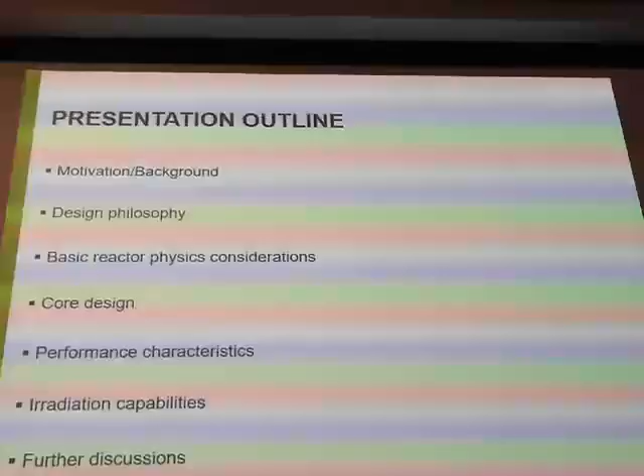It's a very long presentation with a lot of content, so I'll try to skip through it relatively quickly, but at the end, if you have questions, please do not hesitate to ask me.

This study started with the ATDR study, the Advanced Test and Demo Reactor study, which began in fiscal year 2016, a bit more than a year and a half ago. The objective of this study was to define strategic objectives for the country and identify which reactor type would be best suited to meet those objectives.

Three objectives were related to the demonstration reactor, and the fourth objective was related to developing test capability in the US. The FASTER reactor was one of the test reactor concepts developed as part of this study in order to inform all the metrics with respect to the test reactor, but it was not the only one.

Another concept was developed by INL, Idaho National Lab, based on high temperature reactor technology. So we had these two test reactor concepts, and we compared one against another using a set of metrics. I'm not going to talk too much about this study because I could spend an hour on it, but this was a major milestone for the DOE last year, and there's still discussion on moving forward with the findings of this study.

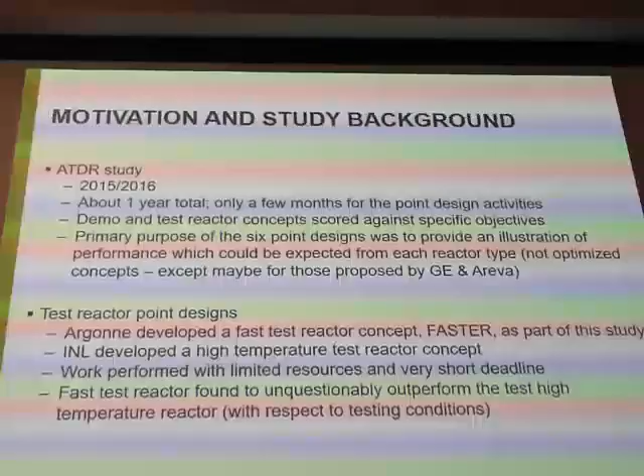For the sake of designing the Fast Test Reactor for this study, we wanted it to be passively safe and sodium cooled. Nothing said it needed to be sodium, but it needed to be fast spectrum. We wanted to use technology which was well established so we have confidence we can deploy this reactor relatively quickly. So don't expect to see a lot of innovation in this reactor. The purpose was not to advance fast reactor technology, but to provide test and irradiation capabilities.

To that purpose, there was a number of desired features. By desired features, I mean if you wanted to score very well as part of this study, you had to meet certain criteria, such as fast flux level needing to be 5×10¹⁵ or higher, thermal flux level needing to be a certain level, and at least 24 test locations, etc., if we wanted to go after the highest score.

But for instance, the HTGR, which was developed as the alternative test reactor, could not meet all those requirements. So don't think it was just okay, I want to meet this requirement and I can get there. But we did the best we could with the Fast Test Reactor.

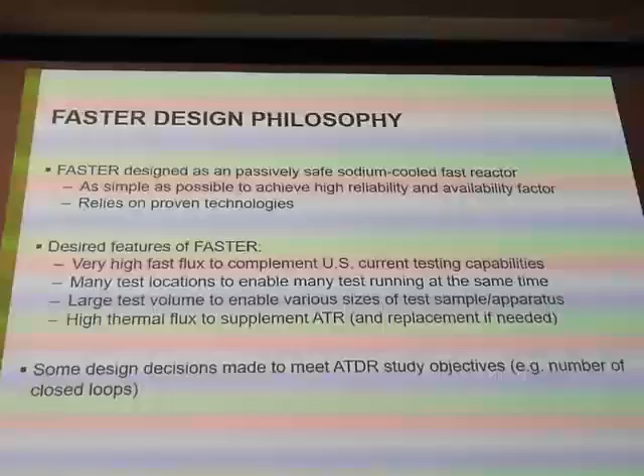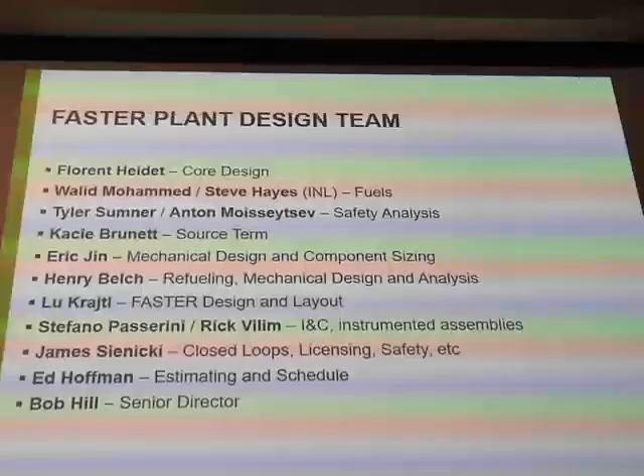So this is a team who worked on this concept for almost a year. I led the core design for this reactor, and there were a bunch of other people at Argonne. Only Steve Hayes was from INL, and he was our expert on metallic fuel, because INL was the only lab who manufactured metallic fuel, so they are still the experts on it. This is not just my work, it's a team effort.

So this is an overview of the characteristics of the reactor. I'll provide a core layout and different views of the plant later on, but this is just to get an idea of what we're going to look at.

So this is a 300 megawatt thermal reactor. As a test reactor, you don't need to produce electricity, because the purpose is just to provide test capability. But in order to recover some of your operating costs, if you can produce electricity and sell it, it makes more sense. The trade-off is you also have to pay for the steam plant if you want to do it. So there are pros and cons, but we decided to design it as producing electricity.

Sodium cooled, it's a pool type reactor. We're using the ternary uranium, plutonium, zirconium metal fuel. Cladding and structural material is HT9, a stainless steel typically used in fast reactors. Average burnup for a fast reactor is very low, only around 3.5%. The peak burnup is less than 5%, so the peak burnup is actually lower than the average burnup you get in a PWR.

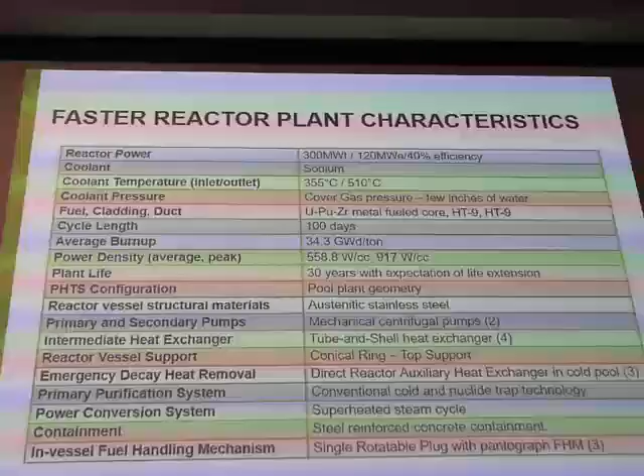The purpose of this machine was not to get good fuel utilization. The purpose was to be compact, to be cost competitive, and to offer very high performance in terms of irradiation capabilities. There are a bunch of engineering features I will mention as we go and look at the different pictures.

So let's start with the core design. This is the part I mostly worked on. I'll provide some physics background just so you understand where we came from and how we ended up with this core design.

First, our objective was to get a high flux level. You need to understand that the neutron flux is almost directly proportional to the specific power of your core - specific power being watts per gram of fuel. There's no magic trick. If you want higher flux, you need to crank up this specific power.

The second thing, which is okay, but if you have very high specific power, you are going to have very high temperatures in the fuel. The peak fuel temperature is dependent on the specific power and the assembly design, mostly the pin diameter. But the peak cladding temperature is not dependent on the specific power - it's mostly just a condition of the coolant temperature, within a few degrees. Some people tend to say the peak cladding temperature is proportional to your specific power, but this is not the case.

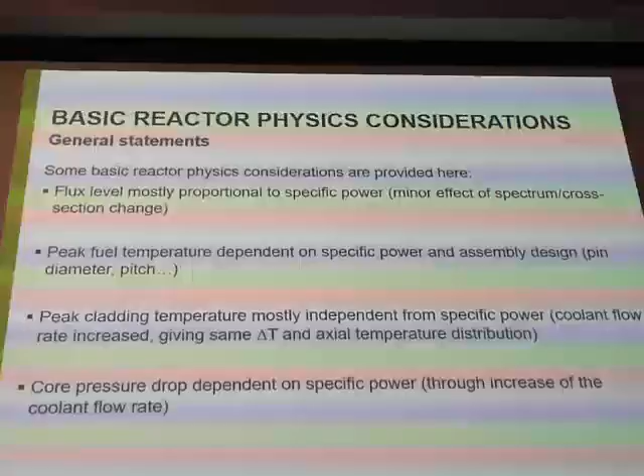And then the pressure drop obviously is proportional to the specific power, though not directly. If you have more power, you need to push more coolant through the reactor, and if you do that, you're just increasing your pressure drop.

So this is a simple story of the process we followed to design the core. Starting point was we want a reactor that needs to be critical - if it's not critical, it's not going to be very helpful. And we want high flux for it. So to make the core critical, we want the smallest, most compact core, so that we don't have an oversized plant which costs too much money.

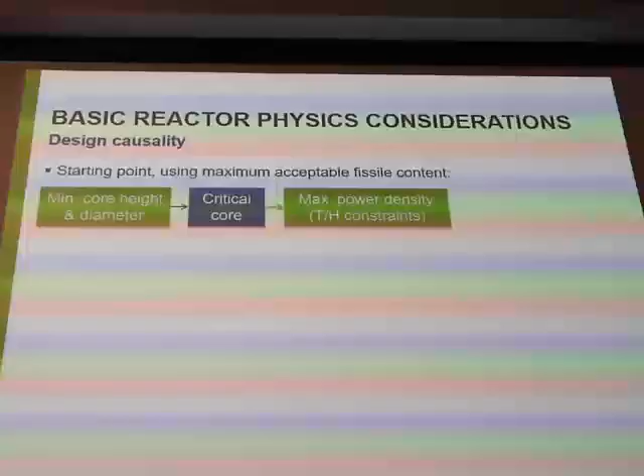So we are looking for the minimum size of the core, the minimum height to diameter ratio that gives us a critical core. Once we have that, it doesn't say what the power needs to be, so we crank up the power to the maximum, where we are very close to the thermal hydraulic constraint - this is basically the maximum power, and therefore the maximum flux we can get from this design. But if you just do that with the minimum core size, the flux level you achieve is nowhere close to 5 times 10 to the 15. It's more like 2 or 3 times 10 to the 15.

So how do you get higher flux? The objective is to increase the flux level. So how do I do that? I need to increase the power density. That's what I just said before. It's very simple.

I increase my power density, but now I'm exceeding my thermal hydraulics constraint, so I need to do something about that. So what I do is reduce the height of the core, reducing my pressure drop, and increase the diameter of the core to keep the core critical.

It's great, but initially I had the better configuration for the core. If I reduce the height-to-diameter ratio of the core, then my core becomes larger. So basically the volume is larger, but I have the same power, which means I'm reducing my flux level because I increase the leakage probability.

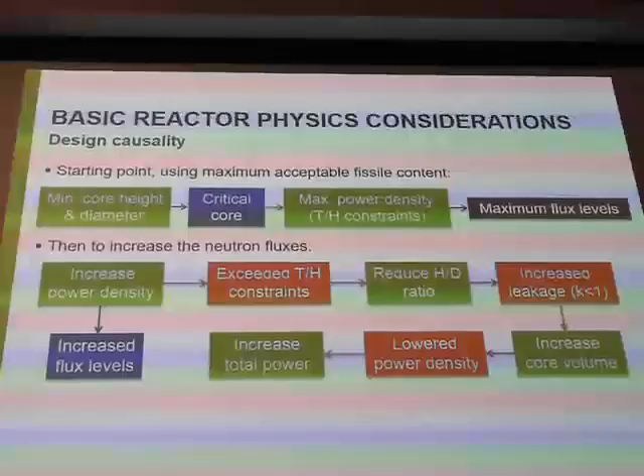So then we need to keep going - because we increase the core volume, we need to increase the power. Sorry, I went backward. Lower power density, I said that, and then we have to increase the total power of the core. So from this starting point, if you go with the minimum size of the core to make it critical with the maximum power density, it's probably 200 megawatts. But because we had to go through all those extra steps to crank up the power, we had to increase the power to 300 megawatts.

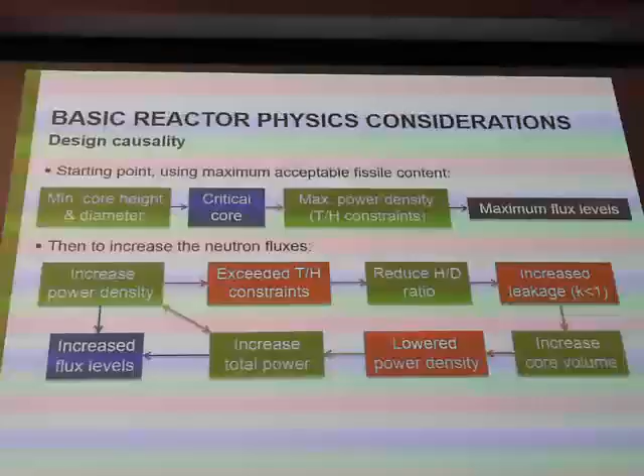Obviously, if we decide that the flux level is not very important, and all we want is, for instance, the testing condition, the coolant, the environment, the temperature, then we don't need to go through all of that, and we can just stick with the simplest design.

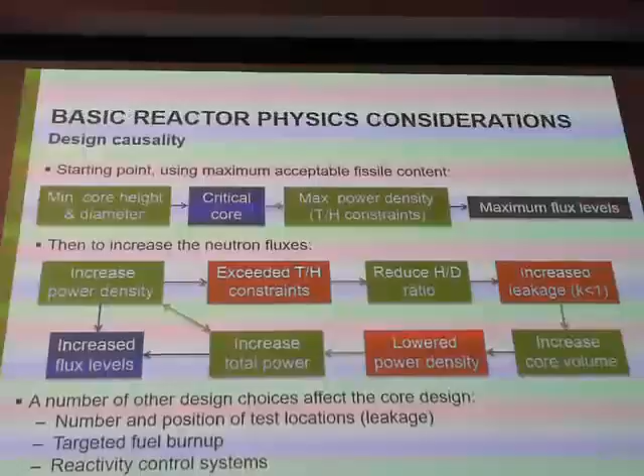There are a number of other considerations, this is a simplified description of the design process, which affect the core design. The number and position of the test locations - the more test locations you have, the more neutrons streaming out of the core, so you're increasing your leakage, making the core larger, or you need higher enrichment. Targeted fuel burnup - the higher the burnup, the more parasitic absorption you have in the reactor. Same thing for the reactivity control system - depending on the location, you can increase the leakage and the parasitic absorption.

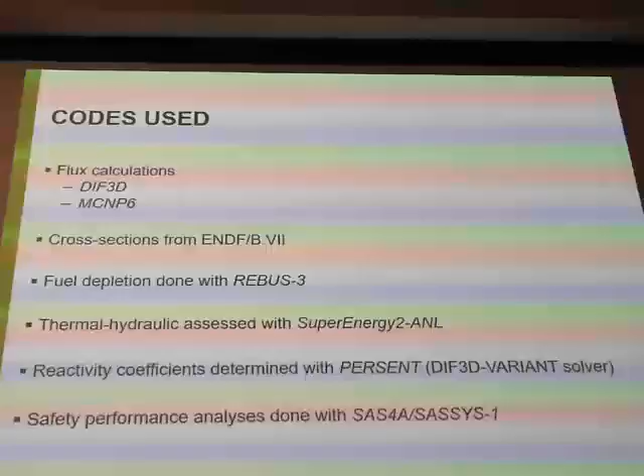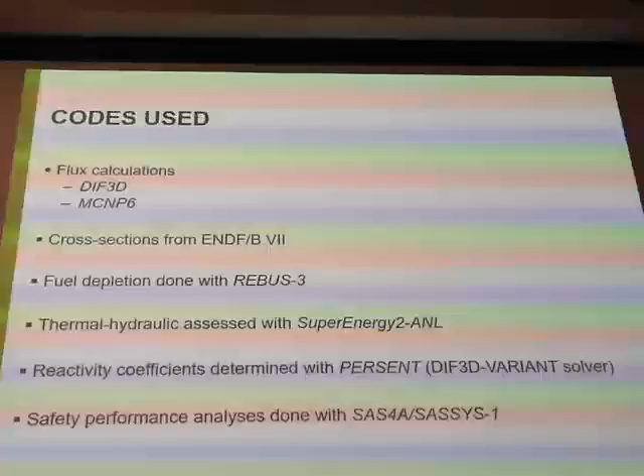So these are the codes we use, basically the codes we have at Argonne and MCNP6. Everybody has this one, libraries are the same. The thermal hydraulics analysis was done with SuperEnergy2-ANL, a MIT code developed many years ago. Reactivity coefficients are done with PERSENT, our perturbation code for fast reactors, and SASSYS, SAS4A, the code we typically use for transient analysis of fast reactors.

So let's take a look at the fuel. This is the only part of the fast reactor design which is slightly out of the ordinary. The purpose was to add as much fuel as possible in a given volume. So we decided first to go to 6 weight percent zirconium instead of the typical 10 weight percent zirconium. There are a number of studies showing that at 6% weight zirconium, all the characteristics of the metallic fuel remain the same, and there is irradiation data actually for 6 weight percent.

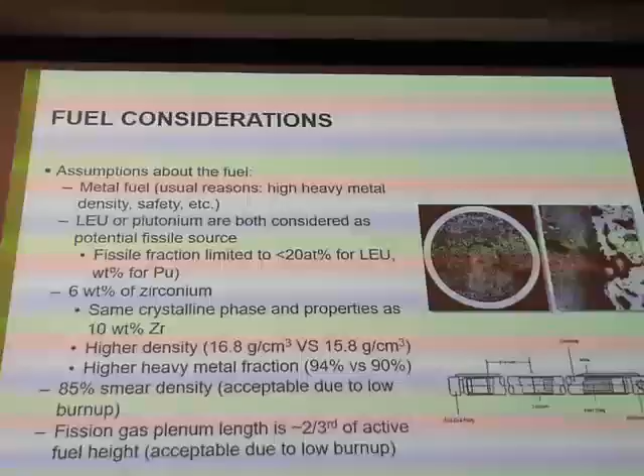We had the choice between LEU or plutonium as a fissile source. Truth be told, if you use LEU, your flux level is going to be 20% lower than if you use plutonium, no matter what - it's based on neutronics, the cross-section and the eta value. So obviously we decided to use plutonium, and because plutonium is not enrichment, we're not talking about enrichment. In theory there is no 20% enrichment limit, and we could go to 60%. But the issue is we did not have any irradiation data past 20%, so we decided to limit the plutonium content to 20% so that we have experimental data to justify that the fuel is going to behave properly.

Another change we did was metallic fuel swells a lot more than oxide fuel. So typically, we call the smear density, which is basically you leave some space between the pin and the cladding itself. So this space is 33% of the fuel volume, meaning we have 33% empty space. And the burnup we're achieving in this case is relatively low, so the fuel isn't going to swell as much as in a typical fast reactor. So we decided to use 85% smear density instead of 75%. And because of that same low burnup, we decided the fission gas plenum, which is typically at least the length of the fuel, will be shorter, so we can have a more compact core and reduce the pressure drop.

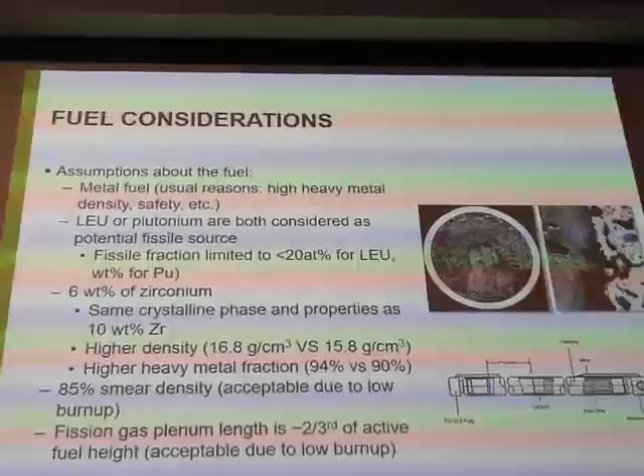So now finally we can see what the core layout looks like. It's somewhat unusual, as you can see. All the blue regions are the fuel assemblies. Dark blue and light blue are basically the same assemblies, same plutonium fraction, etc., just different sets of cross-sections for the neutronics. In light gray, you have the reflector. In dark gray, you have the shield. All the green locations are the test locations. The dark green are what we call closed loops, and I'll talk about that near the end of the presentation. And then we have these regions I will be talking about. In pink, we have the reactivity control system.

So you're probably wondering, it's weird, what is that? It says thermal test location, moderator, thermal closed loop. Because we do not want this test reactor to just provide fast testing capabilities, we want it to be able to provide testing capability for light water reactors, MSRs, HTGRs, etc. What we can do with a fast reactor, because the neutron leakage is so large, we can take advantage of the neutrons leaking out of the core. We can moderate it with graphite, beryllium, zirconium hydride, something like that, and by doing that we can enable thermal testing capabilities.

So in that case, the brown moderator assemblies are made of a beryllium can with zircaloy, but the specifics of this zone are still being refined. But the major issue with having that in a fast reactor is typically your fissile content in the fast reactor will be 20%. You have neutrons leaking out, and the mean free path of a fast neutron is 30 centimeters or more. The pitch of one assembly is 16 centimeters, so the mean free path of a neutron here is at least two assemblies. The neutrons are going to reach these regions, they are going to be moderated, and some of them are going to be reflected back towards the fuel.

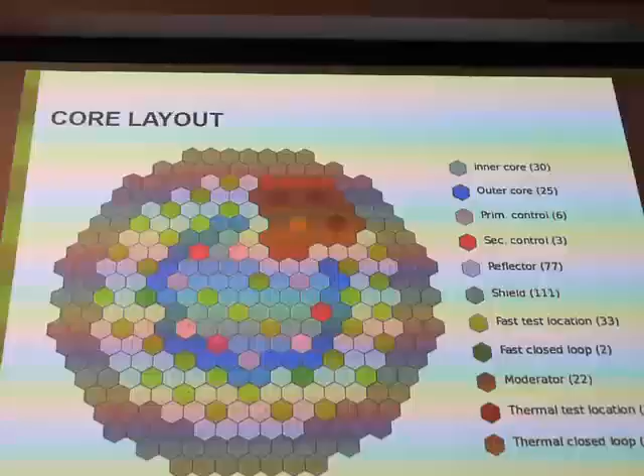So we already went through some of those characteristics. It's a 300 megawatt thermal reactor. The fissile content is nearly 20%. Active fuel height is 80 centimeters, which is a typical height for fast reactors. Beginning of cycle K effective is not very relevant, it's critical. So let's go to the average power density and peak power density. We see the average power density is 560 watts per centimeter cubed. To give you an idea, in a typical fast reactor, this value is 300, so basically we cranked up 75% more power than a typical reactor. And this is exactly why, instead of having a fast flux of 3 times 10 to the 15, it's more like 5 times 10 to the 15, just because it's proportional to power density.

And then what's very interesting and very important is the leakage probability. I'll explain later when talking about the reactivity coefficient why it's so important. These are the flux levels we can achieve. The target for the fast flux was 5.0 times 10 to the 15, so we were slightly above it. The target for the thermal flux was 1 times 10 to the 15 or above.

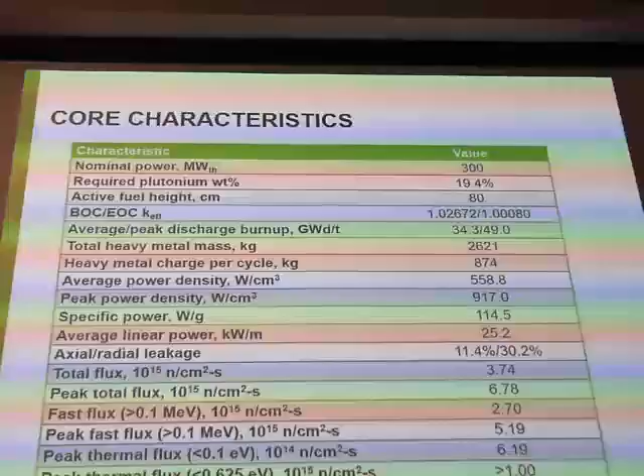To give you an idea of what those values mean, this is a fast reactor which provides some thermal flux, but this thermal flux is higher than what you get in ATR, HFIR, or any other reactor. This is one of the highest thermal fluxes you can find in the world. This illustrates that in fast reactors you can actually achieve very significant thermal flux. It doesn't mean the spectrum in the thermal region is exactly the same as in a thermal reactor, but I have a figure about that later.

So neutron thermalization, I'll go quickly over it. Neutrons leak out and are being moderated. We decided to use beryllium. Initially, we looked at graphite because it's very cheap. First issue: graphite is not necessarily compatible with sodium, so you still need to can it with material to protect it. The second issue is the slowing down power of graphite is not as good as beryllium, so you need a lot more graphite to moderate neutrons, which means your core diameter is going to be larger, and that's really something we do not want.

So beryllium is obviously more expensive. It comes with a set of issues, but this is just one reactor, so we're not concerned about how much beryllium we need. But beryllium has the same issue as graphite - it needs to be canned into something to protect it from contact with sodium.

So HT-9 would have been great, but HT-9, as we've seen, is going to absorb thermal neutrons, so it's not an option. Actually, this is exactly why in PWRs they do not use steel, because iron is not something they want - same thing here. So we decided to use zircaloy 2. Why zircaloy 2? Because this is the only zircaloy which has been tested with sodium. There's nothing saying the other zircaloys are not compatible with sodium, but we wanted to go with something we knew was going to be compatible. That being said, to be fair, it's not been tested at 700 degrees, so at high temperature maybe this is not compatible - more work and research needs to go into this aspect.

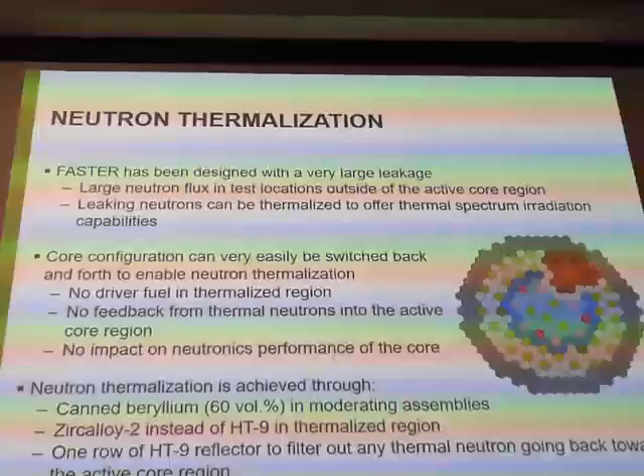So this is the power density distribution. As you can see, this is basically where the thermal zone is. Obviously there's no power in it because there's no fuel. The thermal neutrons will be wandering around there, and you see there's no peak power - the peak power is really located at the center of the fuel region. That's exactly what we wanted.

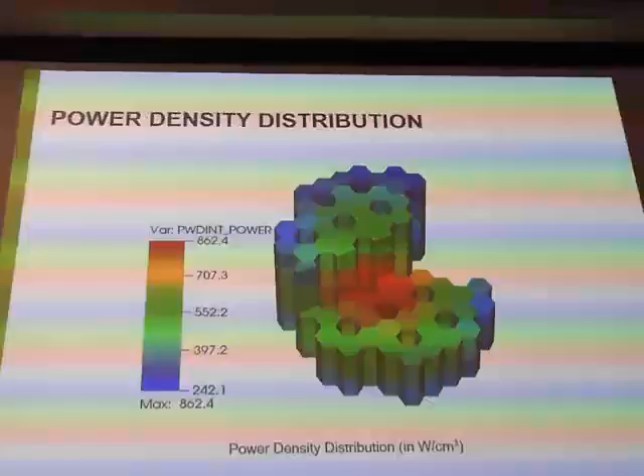This is the flux distribution. In the light blue, at least on this part, this is the fast flux. On this part, this is the thermal flux. Between the red color and the blue color there is a factor of 5, which gives you an idea of how far the fast flux extends and how far the thermal flux extends. Those values are the same as before, so nothing particular, but you can see the clear separation between the thermal flux region and the fast flux region. If you're wondering what the shades are, they're simply the places where you have control assemblies or test assemblies which are empty locations. So obviously if you have no fuel in this location, you have a depression in your flux.

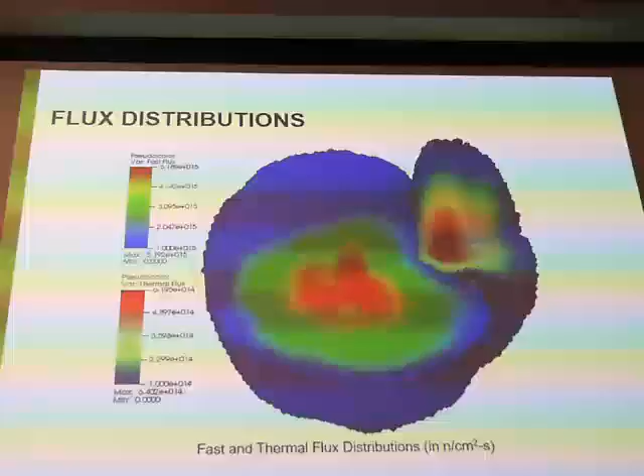So, reactivity coefficients. Very short - we calculated the reactivity coefficients and they are all in line with what we're expecting for a fast reactor, with the exception of just one, which is probably the most important one: the sodium void worth. Typically for a fast reactor, people say the sodium void worth is positive, so it may be an issue - and this is true for large fast reactors. This is a relatively small one, very compact, and very high leakage.

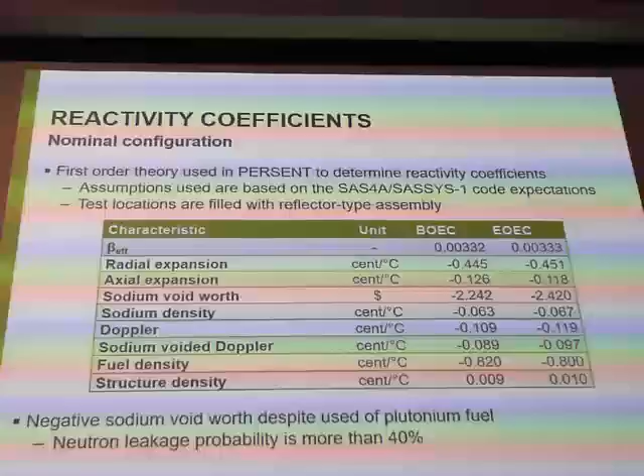So basically what's happening is when you're voiding the coolant from your reactor, you're hardening the spectrum, so you have an increase in reactivity. The compensating effect is that you're increasing the leakage because you're losing your coolant, so you have more streaming out of the reactor. But if you have a reactor designed with very low leakage probability initially, even if you increase this leakage probability by a factor of 1.1, you don't see much increase. In our case, we're losing more than 40% of the neutrons, so any increase in the leakage effect is very significant and results in a negative reactivity insertion, making it very safe.

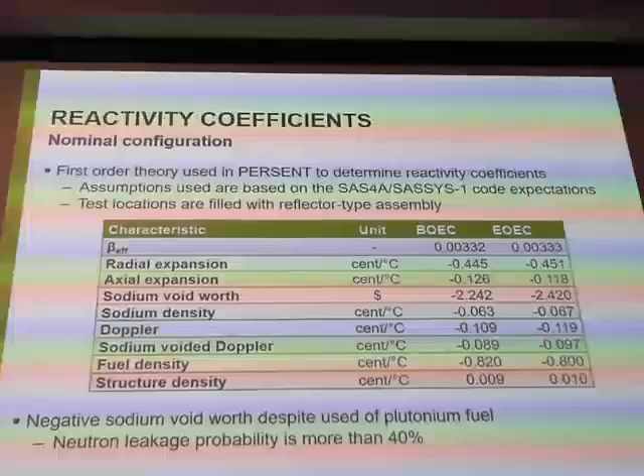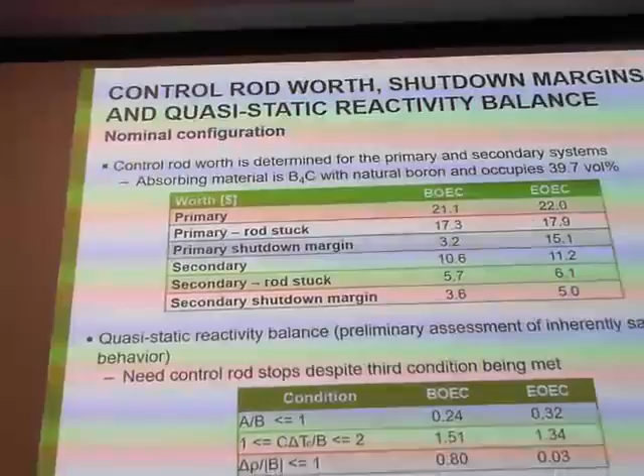So the quasi-static reactivity balance, for people who are probably not familiar with it, it's a very simple approach for fast reactor to verify that in case of accident, the typical accident considered for a fast reactor, the reactor is going to be inherently safe, meaning that the reactor is going to move to a direction where it's going to stabilize itself in safe conditions.

And we have a set of 3 criteria to be met to meet these conditions. So those are the 3 criteria, and those are the values calculated for the FASTER design, and everything checked out. So this was very satisfactory.

We are nowhere close from any of the limits. But that being said, it just means, after you go through your transient, you're in a safe state. It does not mean that during the transient you're not exceeding temperature and you're not melting everything. So don't take it that that's enough and everything is safe. It just means you're going to end up in a safe state if you did not melt anything before that.

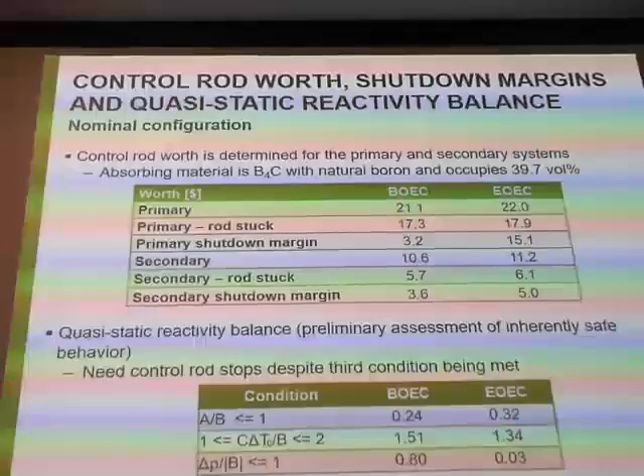So that's our reactivity control, nothing particular there. Typical criteria for fast reactor, like we're assuming that one control rod is stuck, and we want to make sure that just with all those rods minus 1, we can safely shut down the reactor.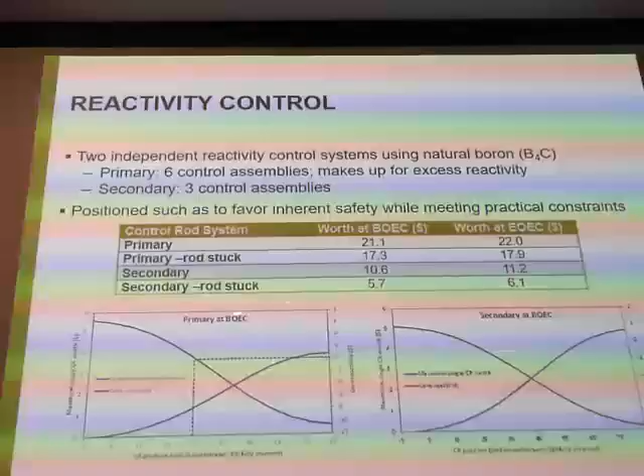All the margins I have on the next slide are fine, the shutdown margin at beginning of cycle and end of cycle. If you're wondering why the end of cycle margin is much larger, or maybe why at beginning of cycle it is lower, it's just because at the beginning of cycle you have excess reactivity because you have fresh fuel. So you have to compensate for the excess reactivity initially. At the end of the cycle you have no excess reactivity.

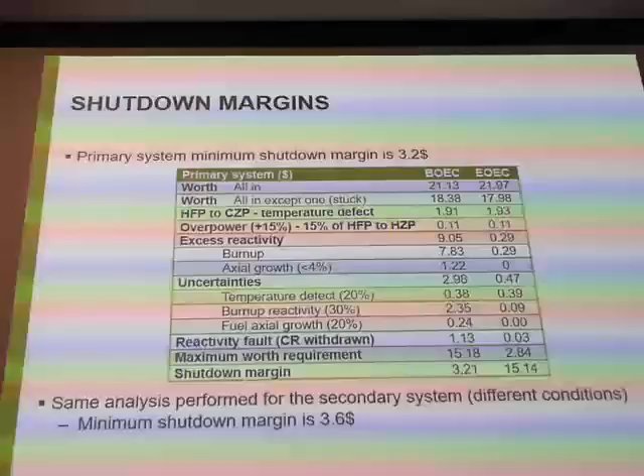So thermohydraulics considerations. In one of the first few slides I showed, the thermohydraulics was one of the design steps for this faster reactor. So what we typically do when we look at the thermal hydraulics for fast reactor, we look at the power generated in each of the assemblies, including the reflector and the shield, because there is gamma energy deposition and neutron energy deposition in those assemblies.

And we determine what coolant flow rate is required in each assembly to properly cool every assembly. We do not want to have issues, so we adjust the flow in each assembly by having an orifice plate at the bottom of the assembly. But we do not want every assembly to have a different size of orifice plate. Otherwise, managing the different assemblies becomes very difficult because they will all be different.

So we're trying to group assemblies having the same power together, so we have only a few groups. We went through this design step where you have to look at how you group the assemblies, and recalculate the transfer of heat between the different assemblies, and those are really the values we are interested in at the end of this analysis.

So the peak coolant temperature, outlet coolant temperature is 550. The average is 510, so we're just 40 degrees above the average, so it's pretty good. The clad mid-wall temperature is 590. It's relatively high, especially for plutonium fuel. Typically we like it to be 580 or below, but because we're cranking up 75% more power than in conventional fast reactor, that's still satisfactory.

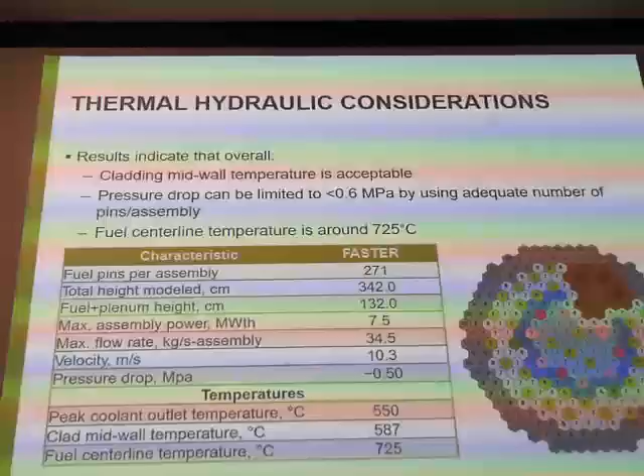So those are the different groups. We had 4 groups for the fuel, and another 7 groups for the non-fuel assemblies. The design objective was to minimize the peak 2-sigma mid-wall temperature, so that's the 587 I mentioned on the previous slide.

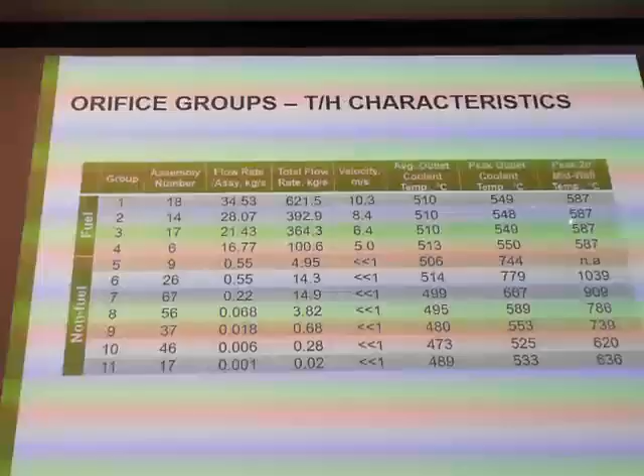So now let's take a look at the plant layout, and then we'll jump into the safety analysis.

This is what it looks like. So it's very busy. You have your core right there. You have your assemblies, you have the pump, one of the pumps you see there, and you have the heat exchanger. As you can see, it's a pool type, so everything is filled with sodium.

You have the instrument tree rotating above your assembly, so you can instrument all the test locations, so you can do all the measurements you may want.

You have the fuel handling machine. This one is slightly innovative. This was not one that was used in EBR2 or FFTF. This one was designed 10 years ago at Argonne for another reactor we worked on before, but it's never been used in an operating reactor to this point.

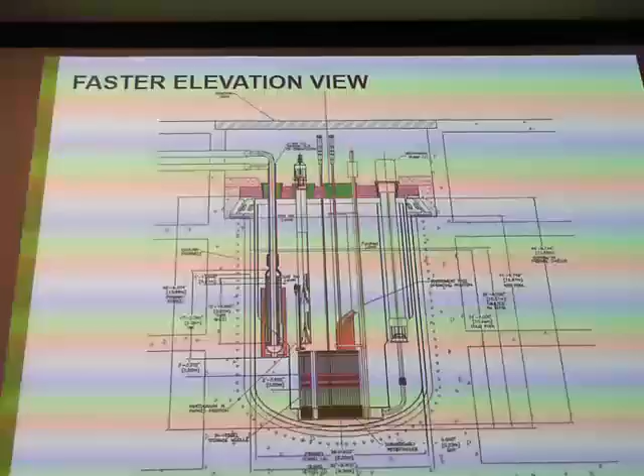And this is a cross-cut, and I will have a slightly zoomed-in cross-cut of the plant layout. So you have the 4 heat exchangers there. You have the 2 mechanical pumps on each side.

Let's see what we have. We have the DRACS. So the system in black are basically fingers going into the sodium pools. In case of accident, if you're losing your heat sink, you're still removing a fraction of the total power from the sodium. So this is a mechanism through which fast reactors can remove heat without having any circulation of sodium.

And then we have the green line, which are basically the line going to the closed loops. And once again, I'll explain what closed loops are slightly later.

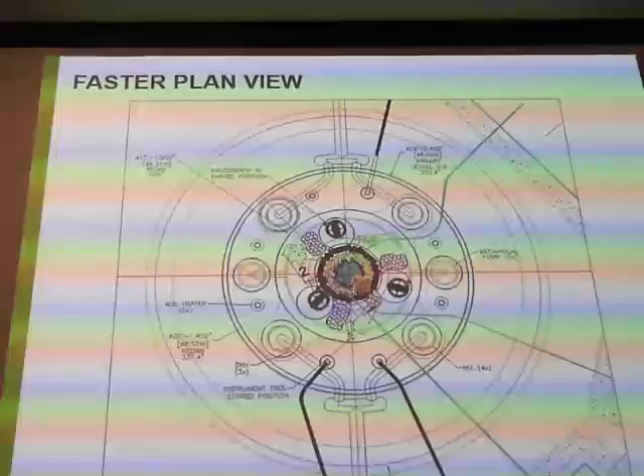And then let's take a look at the zoomed in one. So that's the same one. So you see the core shape. It's been slightly rotated compared to the figure I showed before.

And we have the 3 fuel handling machines. So the question, why 3? If you go with one, it's going to be cheaper. Yeah, it's true. But the issue is because of the closed loops. So closed loops basically have a tube coming out of them, so they prevent you from rotating the fuel handling machine above them. So this fuel handling machine needs to go around this one. And same thing for the instrument tree.

We have 3 instrument trees, and all 3 of them are rotating in place during operation. This is the position when we are refueling the reactor, where they are out of the way.

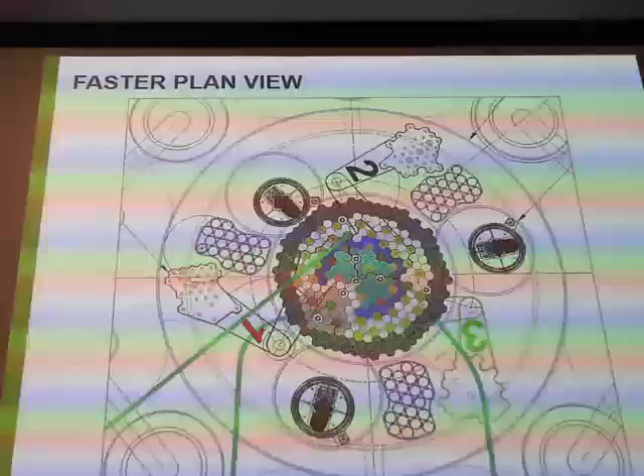And we have the in-vessel fuel storage. So the fuel, after it's been burned for a given amount of time, we take it out of the core, we put it there. We put fresh fuel assembly in the reactor. And after it stays in this position for a few years, we take it out, and then we can dispose of it, reuse it, or whatever else.

So this is just the refueling position. This is the reactor during refueling. So you have the 3 instrument trees I talked about, so they're out of the way. And during operation, as you can see, they're right above the core.

So just to show that by rotating them, we are able to cover all the test locations except a few, which we decided not to, because we're not expecting that everybody will want an instrumented test location. Some people just want to put a material there. They don't really care with the condition. They just want it to irradiate.

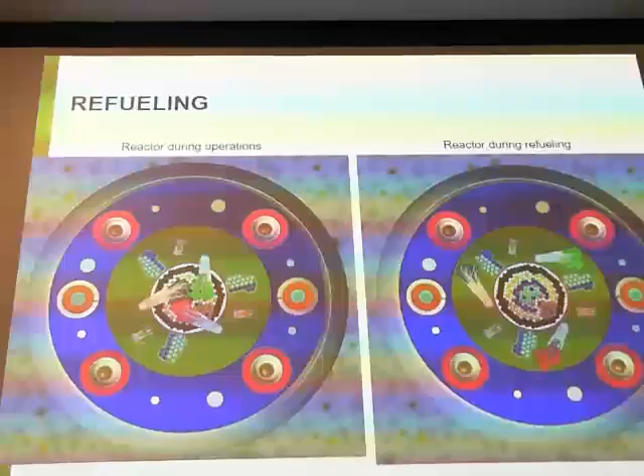So, safety analysis. Let's see.

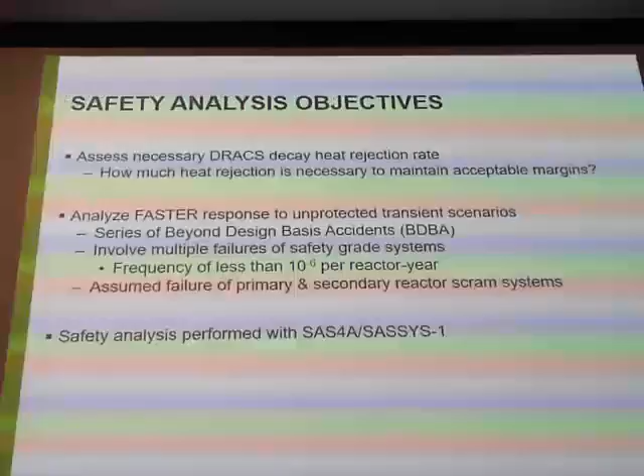So there were two objectives for the safety analysis. The first one was to verify that the DRACS, so direct, these are the fingers I talked about, basically the direct heat removal system, were sized properly to remove enough heat from the sodium pool in case of accident. And then the second part was just to look at unprotected transient scenarios and make sure that the core does not exceed any condition. Unprotected means there is no scram, there is no reaction from the operator, there is nothing happening. Something goes bad, nobody does anything about it. Let's see what happens. It's kind of the worst case scenario.

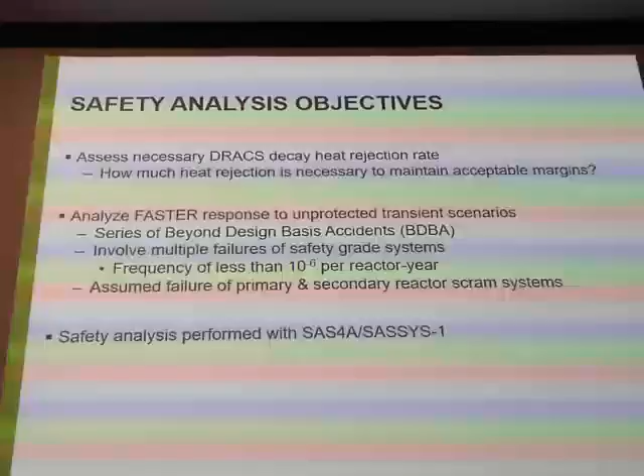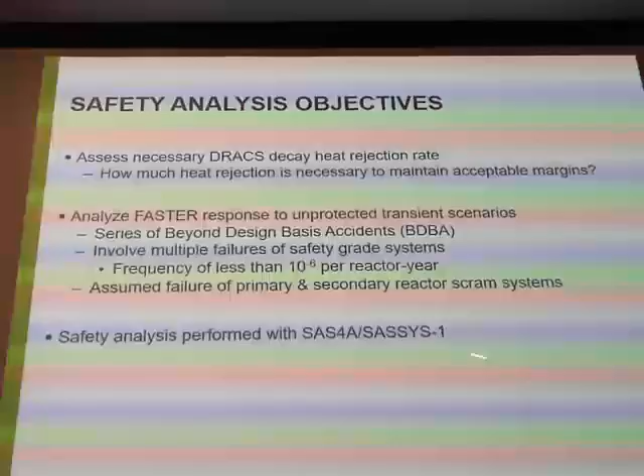If any characteristic of the core is off normal condition, you will scram it, so it will not be such a stringent scenario. So obviously the frequency of those events occurring is extremely low, especially because it assumes multiple failures of critical components. Safety analysis was performed with SAS4A, that's a typical code, in the US at least, for safety analysis of fast reactors.

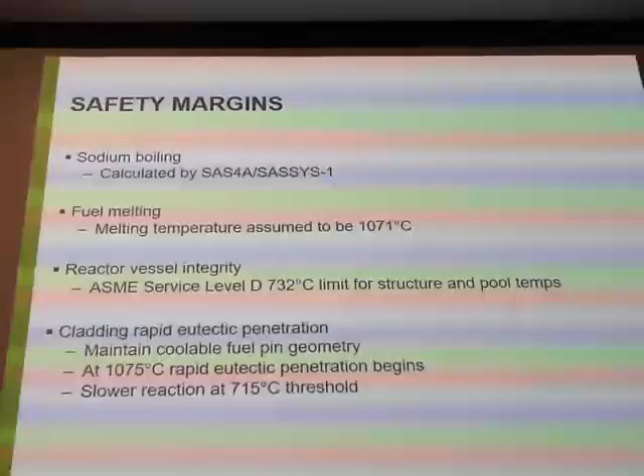So the margins are the following. We don't want sodium to boil, so this sodium boiling point is calculated by SAS4A. Fuel melting temperature is not calculated by SAS4A, and this is depending on the composition of the fuel. So for uranium-based fuel, it's 50 degrees higher than this value, but for plutonium-based fuel, this is 1071 degrees Celsius. Reactor vessel integrity - there are standards not to exceed, so this is ASME service level D.

So that's the value provided for pool-type fast reactors.

For the cladding, which is a major concern, we want to maintain a coolable fuel pin geometry. Basically, it means we are okay if we are melting the fuel near the center line, as long as the cladding retains its shape and coolant can flow around it. But if we have a breach of the cladding, or relocation of the fuel within the pin, this is not a coolable geometry.

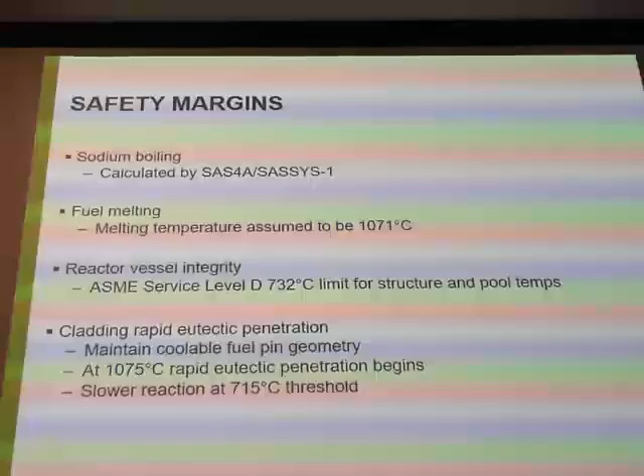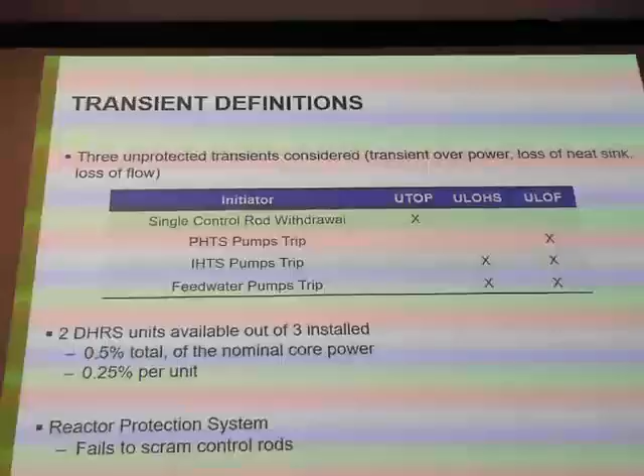We're assuming we have a control rod being removed fully by accident, an ejection of the control rod. Typically in the safety analysis we assume a withdrawal speed, so it's not removed in a second, we assume it's removed by a few centimeters a second.

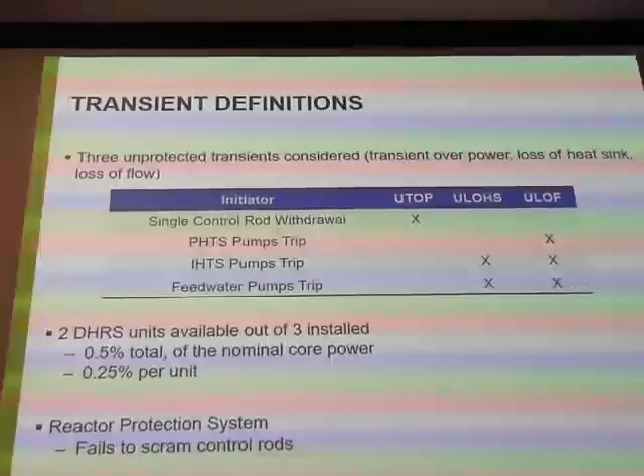We're assuming the DHRS, or DRACS, same thing different names. We have 3 of them in the pool, and we assume only 2 of them are operational. Those are passive features, so there's no reason one of them wouldn't work, but we assume one is not working if, for some reason, the connection is broken or something like that. This is not an active system.

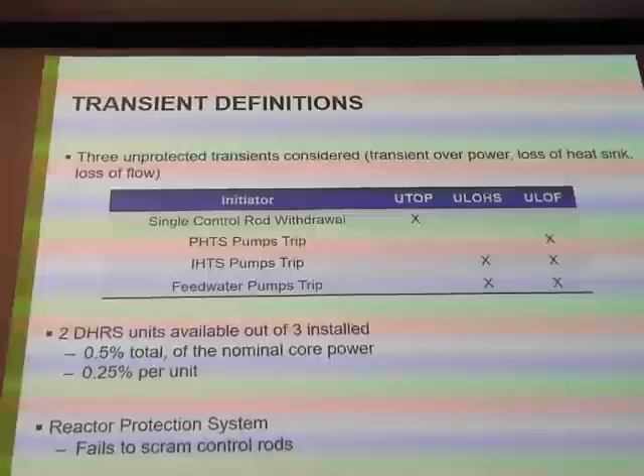Each unit is supposed to remove 0.25% of the total core power, so 2 of them is only 0.5% of total core power. Don't think you're removing most of the power to the system, it's very minimal. And the reactor, like I said, is uncontrolled, so there's no scram of the reactor.

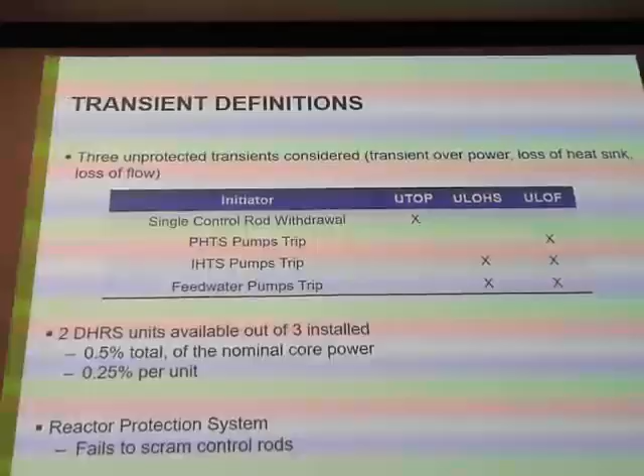Those are just dynamic effects of compensation, like the core expanding, contracting, loss of coolant, etc. Changes in temperature, all of these effects take different time to come into play. The vessel of the core is taken into consideration, and the control rod drive line being withdrawn as the vessel is expanding. All of that is taken into consideration in SAS.

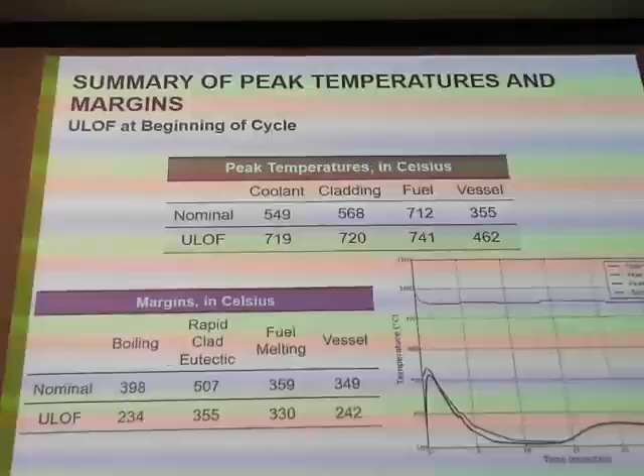And like I said, in order to see significant cladding damage, you need to be above 710 degrees for several minutes or hours. So this is acceptable, all the other margins are fine. This point, after a long time, is what we calculated through the reactivity balance approach previously, but the reactivity balance does not give you this transient. So this is a good illustration that at this point the temperatures are fine, but you need a full-blown study to make sure that during the entire transient you're not melting anything.

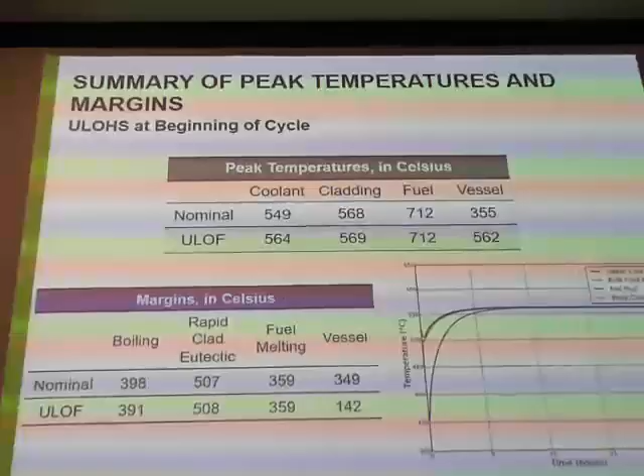So those results are for the loss of heat sink. This is very straightforward: everything goes up to the outlet temperature of 560 degrees, so there are no peaks or anything. This is just the equilibrium temperature, and all the temperatures are relatively low, especially compared to the previous accident scenario.

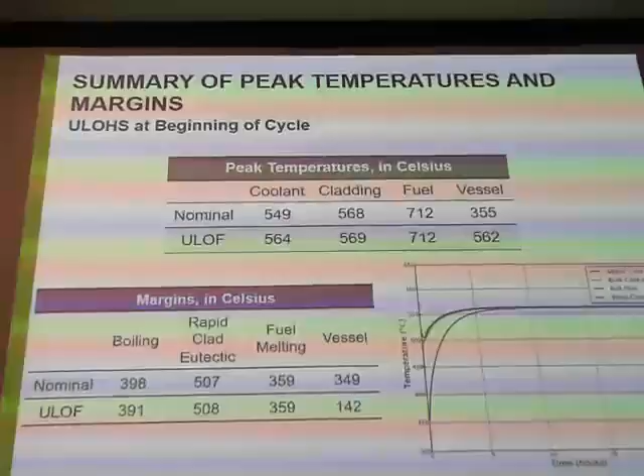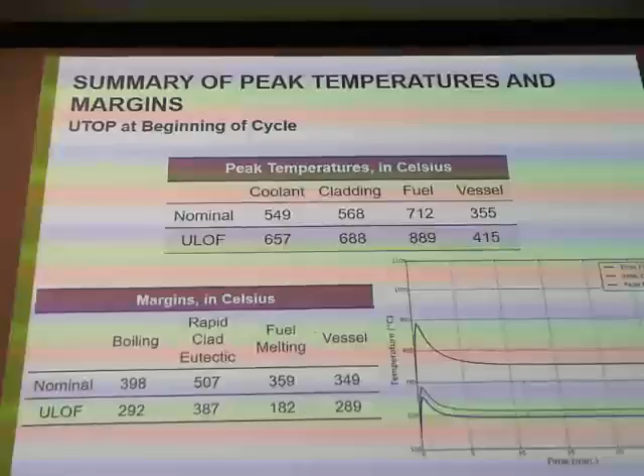That being said, those locations do not have to be this way. It's a fast reactor, so neutrons travel very far, and we could literally double the number of test locations in the reflector and it would make no difference on core performance, safety analysis, or anything. We just arbitrarily took 33 locations to avoid contact with any of those, just to have more margin, but there's no reason you couldn't have more or fewer test locations.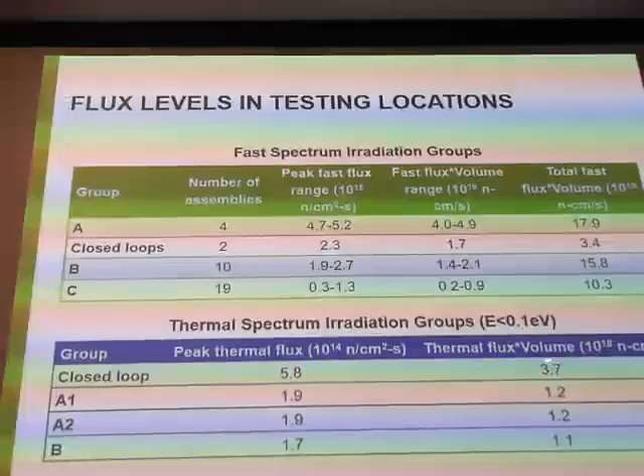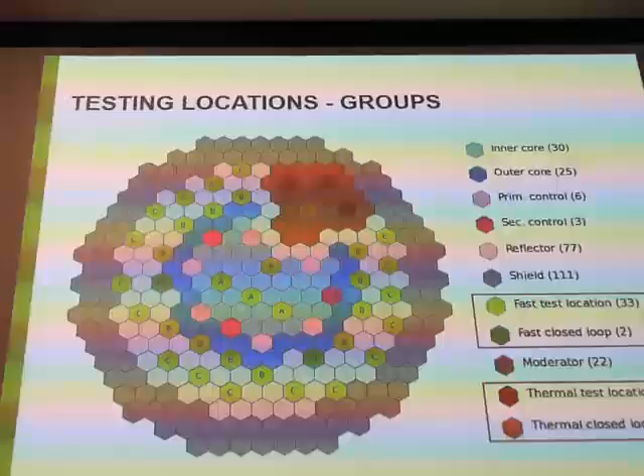This is basically exactly what I said before: in the thermal region, you have a flux at this point, and for an assembly further down the line, you have a reduction of a factor of 3. For the fast flux, you needed basically 6 or 7 assemblies to see the same reduction in flux level. I already covered this one.

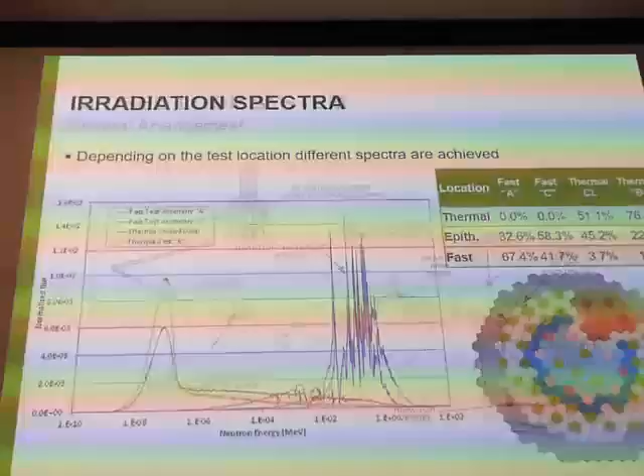So now the last part, the closed loops. It's nothing new, it was developed for FFTF many years ago. They've never been loaded in the core itself, but the FFTF reactor, the fast flux test facility, was designed with being able to incorporate four closed loops in the design.

The closed loop is basically a closed system, a loop that goes into the reactor and out. The coolant you have in the loop does not need to be sodium, it could be anything you want. The issue is if it's a different coolant, you need a different system to pump it, remove the heat, etc. So it becomes very significant machinery.

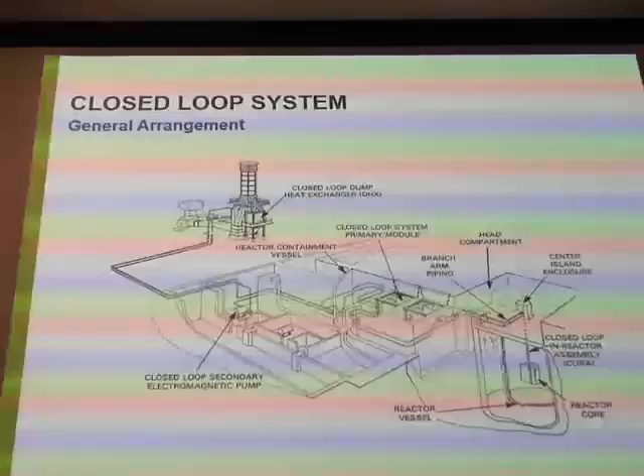Those modules were actually not for different coolants, they were for sodium. But because of these modules, the big advantage is that you could actually design experiments in which you're melting your fuel on purpose. You can get to that point because it's a closed system, so you can remove it and do whatever you want, and it's not going to contaminate the rest of the reactor.

You could have molten salt, helium, lead, or any coolant you can imagine. Obviously, if you start putting water in a test location near the core center, your fast reactor is not going to be very happy because you're going to thermalize neutrons. But for locations further away, especially in the thermal section, you could put water there with no issue.

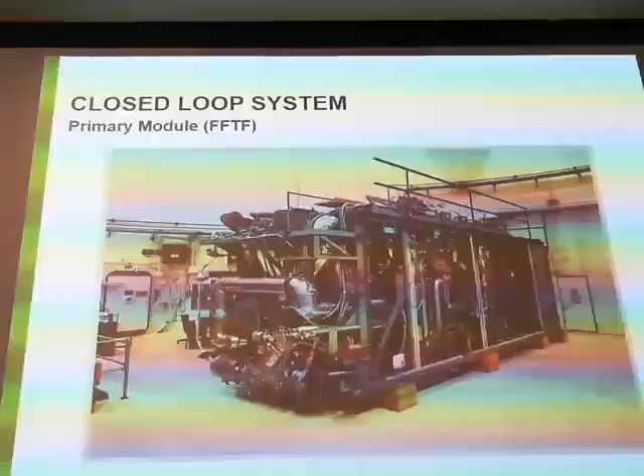That being said, it's possible to design the closed loop, but it comes at a very significant cost. For FFTF, each closed loop module cost $100 million. So if you put three of them in the concept, that's like $300 million. It's a shame if it ends up like FFTF where they've not been used - $300 million for nothing, literally. But I mean, not nothing, because we learned a lot from the FFTF design, and basically we can replicate it.

And why did we use three? It was one of the criteria for the study that this reactor design was for.

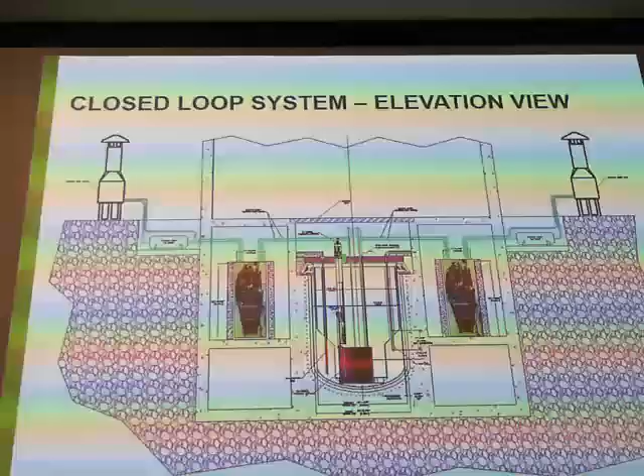A few more discussion remarks, and then I'll be done and you can ask questions. The layout of the core is very unusual, not like a circular core you see in most designs. The reason was because we were trying to get this thermal zone closer to the core center, so we could get higher thermal flux. So obviously it was not the least leaky core - we could have made it more compact by making it circular, and actually have thermal region all around the core.

The reflector region, like I mentioned, you can increase or reduce it if you want more or less testing locations. And the last thing is the closed loops right now are all at 120 degrees, which forces us to have 3 fuel handling machines, 3 instrument trees, etc. We could actually line them up so that we could get just 2 of those machines instead of 3, cutting a bit on the cost.

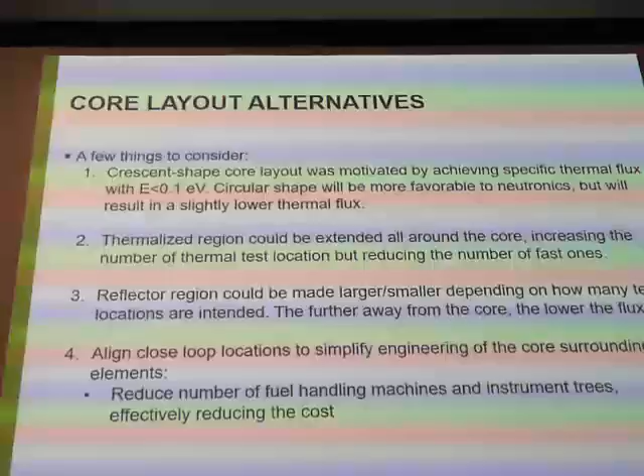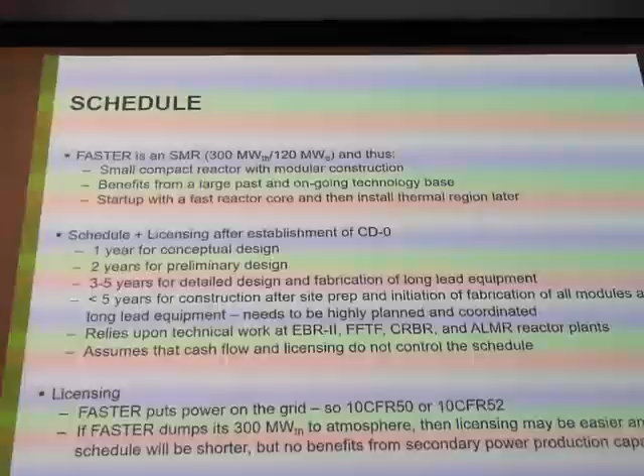So that's the schedule for this reactor. Obviously, as part of the study, we did economic analysis. This reactor with the heat conversion system and the 3 closed loops is supposed to cost $2.8 billion, licensing and everything included. And we believe we can operate it in theory 13 years from now, assuming there is no money limitation and no licensing trouble.